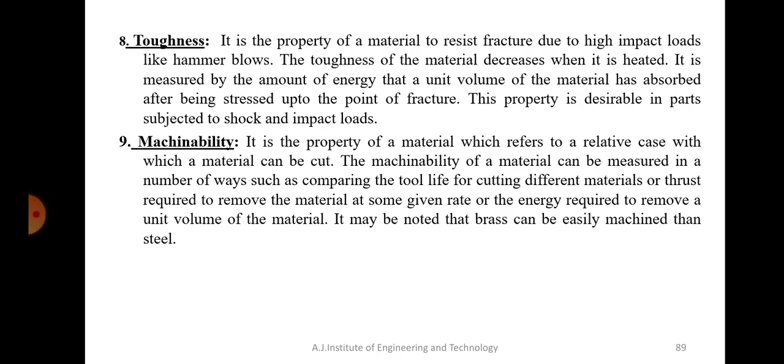Next, the last set of properties is resilience. What is resilience? Resilience is a property of a material to absorb energy and resist shock and impact loads. It is measured by the amount of energy absorbed per unit volume within the elastic limit. This sounds similar to toughness, but toughness is the ability of the material to withstand fracture, meaning without breaking. Resilience is the property of the material to absorb energy and resist shocks within the elastic limit.

These kinds of properties are usually required in the case of springs or suspension systems, because when the load is applied, it should be able to immediately take up the load and then release it. That is the work of a spring material generally. When there are shocks or impacts, it has to absorb that load and then release it, and it has to be elastic in nature within the elastic limit. That is called resilience.

Next there is one more property called fatigue. What is fatigue? If you see the previous kind of loadings I was telling you, suppose the material is to be broken at a particular load - that means you start applying the load onto the material, and at a particular load it is supposed to break. That is the maximum strength of the material, right?

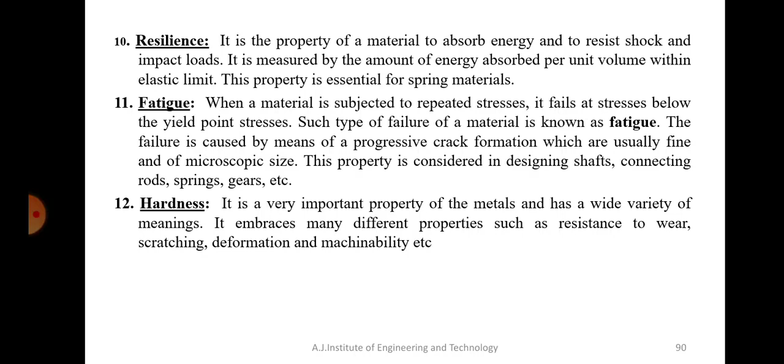So the classification of ferrous and non-ferrous materials, we have already seen this, but this is put in a table. On the left hand side we have ferrous materials, and on the right non-ferrous materials. Under ferrous materials, first is pig iron, wrought iron, then cast iron, which is categorized into 4 types: grey cast iron, white cast iron, malleable cast iron, and ductile cast iron. Then steels: low carbon steel, medium carbon steel, high carbon steel, alloy steels, tool steels, and stainless steels.

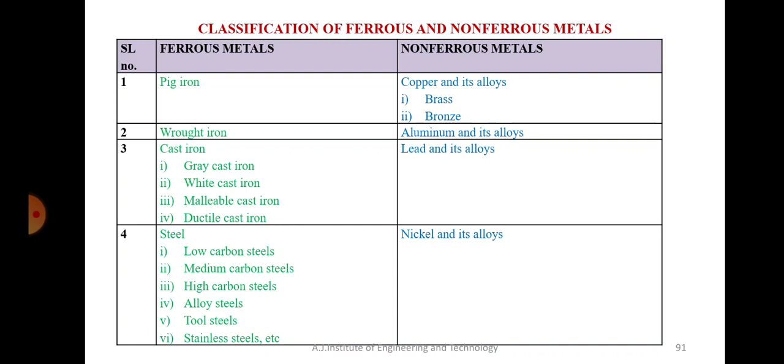Coming into non-ferrous metals, we have copper and alloys of copper, that is brass and bronze, aluminium and different alloys of aluminium, lead and different alloys of lead, nickel and its alloys. So we have to study both ferrous as well as non-ferrous materials. So first we'll start with the ferrous materials.

Okay, so ferrous materials, as I've told you earlier, I'm just repeating it again. These are the materials which contain iron as the major constituent. So majority of this is iron, and then we have smaller additions, which we have to see how it is differentiating. The major component will always remain iron. Depending on what you are adding into that will make different forms of iron.

So the principal raw material for all the ferrous materials is pig iron, which is basically obtained from smelting of iron ore with coke and limestone in the furnace. So where do we get this pig iron? Basically, pig iron is got from the ores. I hope you know all these things. You have studied this in your school, the different ores of iron.

So which are the different ores of iron you have? You have magnetite, hematite, limonite and siderite. There are four variants of iron ores. We get different ores in different places. We also get one in Kudremukh, which is very much near to us, Kudremukh iron ore. So we get different forms of ores in different places. From the ore, we extract iron.

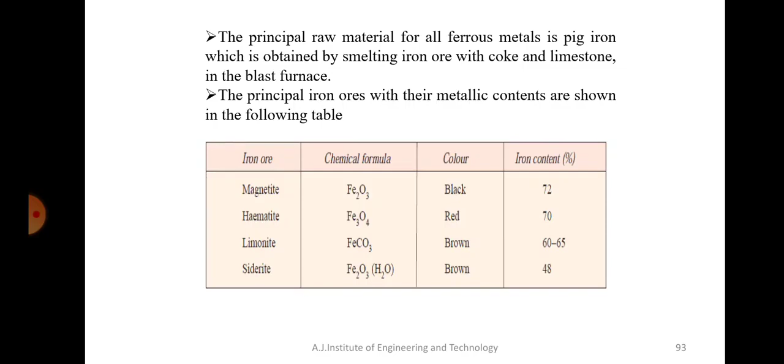So what does magnetite mean? Magnetite, the chemical formula is Fe2O3. It is generally black in color, and in this ore generally 72% iron is present. Similarly, we have hematite, which is Fe3O4, which is red in color, with 70% iron content. And limonite, FeCO3, brown in color, 60 to 65% iron. And siderite, Fe2O3(H2O), brown in color, around 48% iron. So these are the four ores from which we can extract iron.

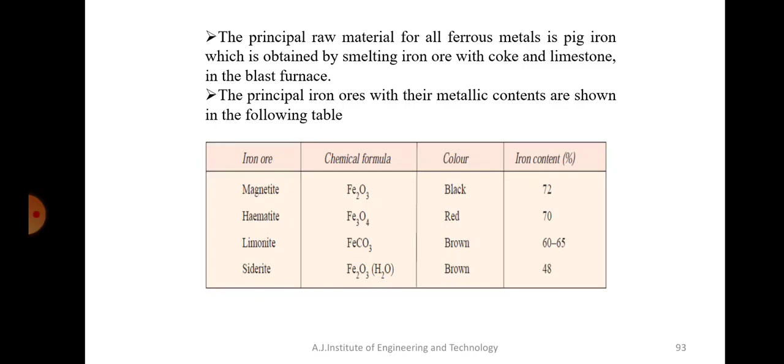We take this iron ore, we need a catalyst, we add coke and limestone, and then we heat it in the furnace. When we heat it in the furnace, the molten metal we get is actually pig iron. So what we obtain from that is called pig iron. Okay, so the first one, pig iron. So what is pig iron?

As I've already told you, pig iron is a semi-finished ferrous metal produced in a blast furnace by smelting iron ore and coke combined with a flux like limestone. So when you add iron ore with coke and limestone, what you get is pig iron. In the sketch here you can see, iron ore plus coke plus limestone, you get this pig iron. Now this is what I have told you.

So whenever you write in the examination, I know it's not going to be easy to remember each and everything, but at least try to remember the major constituents, their percentages, and then the properties and the application. For example, you need to write what is pig iron and how is it obtained. Pig iron is obtained when iron ore along with coke and limestone is smelted in a blast furnace.

Now what are the compositions? It contains 92% iron, 3.5 to 4.5% carbon, 0.5 to 3% silicon, 0.04 to 0.2% sulfur, 0.5 to 2.5% manganese, and 0.04 to 1% phosphorus.

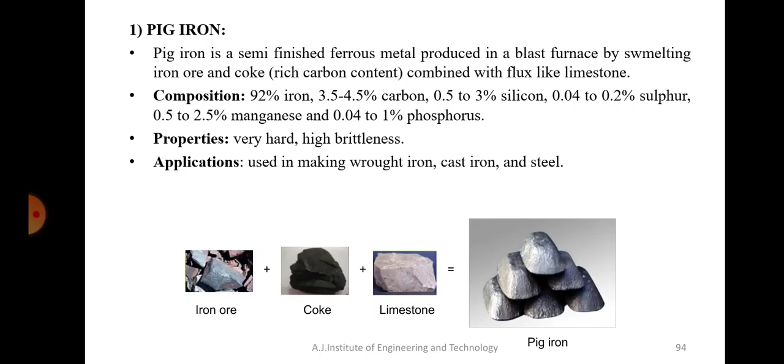Okay, so that is about pig iron. So next we will go to cast iron. Now cast iron is one of the important materials that is used in the mechanical field. There are a lot of products that are made of cast iron because of its different properties. Okay, so cast iron is a ferrous material that is produced when pig iron is remelted in a cupola furnace and poured into molds in order to make castings.

Okay, now what do you mean by this term casting? So casting is a process of producing a component, a part, by melting the base metal, melting the pig iron in this case. And when the pig iron is melted completely and becomes liquid, it is poured into some cavity. And when it is cooled, it will take the shape of the cavity and that becomes a product. And that is how cast iron is obtained. So that process is called casting.

Okay, and cast iron also gets its name from this process by which it is produced. Understand? Cast iron is generally produced by the process of casting, and that is why this iron is called cast iron. Okay, because it is made by casting.

So what is the composition of this cast iron now? It contains 90 to 92% of iron, 2 to 4.5% of carbon, 1 to 3% of silicon, and very small amounts of sulfur, manganese, and phosphorus. Almost the same things that were in pig iron, because you're not doing anything great here. You're only remelting pig iron, and then you are pouring it into a mold.

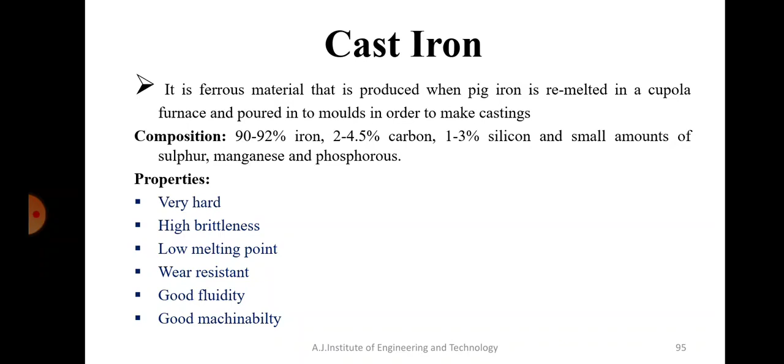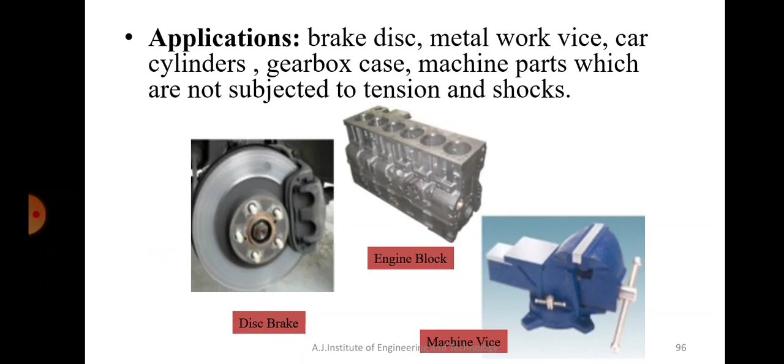So next, let us see some of the applications of cast iron. As you can see in the sketches, applications include brake discs, metalwork vises, cylinders, gearbox cases, and machine parts which are generally not subjected to tension and shocks, because it is brittle in nature and does not have good resilience and toughness. So you can see some of the components: the disc brakes, the engine blocks inside which the piston cylinders are placed, the vises.

What do you mean by this vise? A vise is used to hold the workpiece when you are doing some operations on it. That is, when you want to cut a metal part, or when you want to do filing on it to remove the top surface, you will fix that workpiece on a work holding device, and that is called a vise. Okay, so apart from this, it is also used in the casing of gearboxes, as shown in the figure.

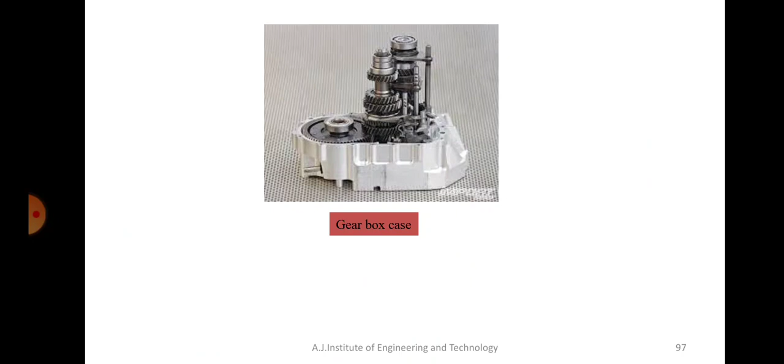Okay, so next is wrought iron. It is produced from pig iron again by burning carbon, silicon, manganese, phosphorus, and sulfur inside a puddling furnace. Okay, so you are varying the percentage of iron, carbon and other things, so that you get a different form of iron. Basically they're all the same, but because you're changing small amounts of materials in them, their properties will change. And depending on the change in properties, their application will change.

Okay, so its composition contains 99.8% iron, so the majority of it is only iron, with carbon content ranging from 0.05 to 0.25%, 0.12% silicon, 0.018% sulfur, 0.02% phosphorus, and 0.07% slag. So you can see 99.8% is basically iron with a very small amount of other materials.

Okay, properties. They are soft, ductile compared to cast iron, it has high toughness, better tensile strength, good machinability, good corrosion resistance, a high melting point, and good weldability.

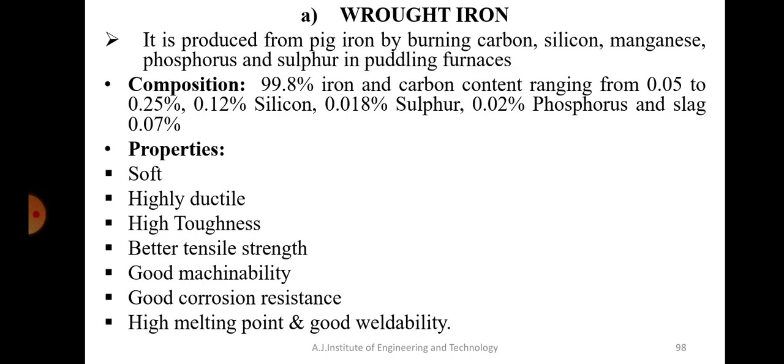Okay, so the applications: wrought iron is basically used in making pipes, water pipes as well as steam pipes, and in making bars, in the sense the metal rods we call bars. If it is usually circular in cross section, we call it shafts, and if it is of any other cross section, generally rectangular or square cross section, we generally call them bars.

Then it is used in making engine bolts, rivets, railway couplings, etc. Another important application, as you can see, is making iron bars and grills for windows, balconies, fences, gates, etc. It is also used in crane hooks and chains. All those sketches have been put here. Even in the next slide you can see all those things I've told you.

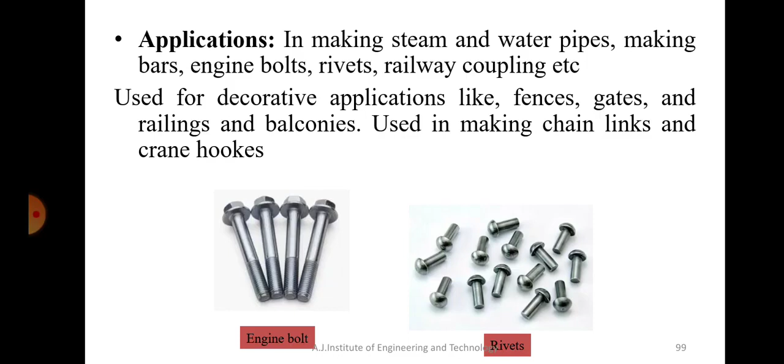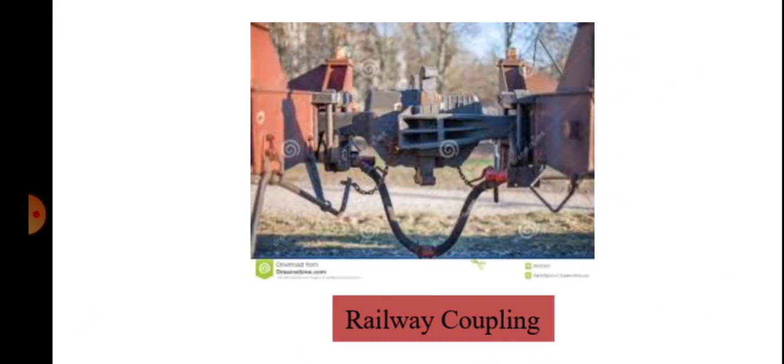So engine bolts are done in wrought iron. Rivets. In the next slide we can also see the railway coupling here. A coupling connects two bogies, one to another. Then boiler tubes, and also crane hooks. So these are the different applications where wrought iron can be used.

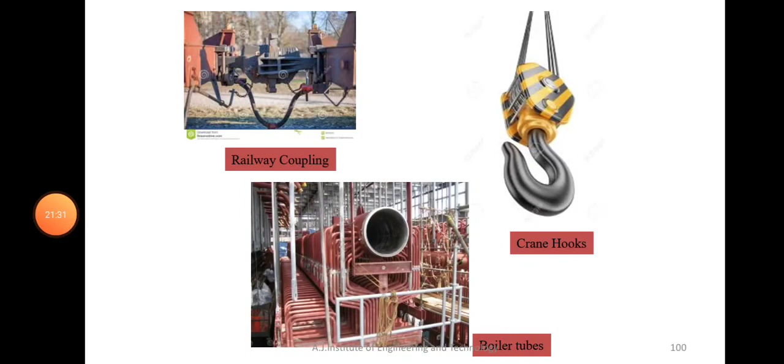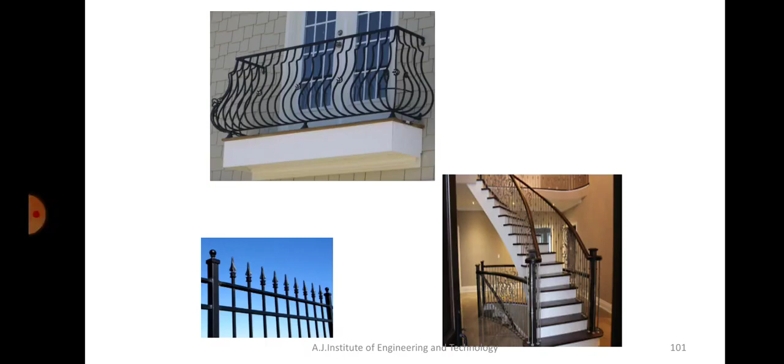Okay, so these are some of the examples again, as I told you earlier. You can see the fences, staircases, balconies, and grills all use wrought iron.

Okay, so next, within cast iron, is grey cast iron. What is grey cast iron, and why is it called that? Because of its microstructure. If you see the microstructure, there are graphite flakes present in this cast iron which are greyish in color, and that is why it's called grey cast iron. If I zoom into the sketch, this is the microstructure of grey cast iron. It contains these graphite flakes which are greyish in color, and that is why the name is given.

Its fractured surface appears grey due to the presence of graphite flakes. The composition includes 2.5 to 4% carbon, 1.3 to 2.3% silicon, 6 to 10% graphite, and small amounts of sulfur, phosphorus, and manganese, and the rest is iron. So obviously the major part is iron, with negligible quantities of sulfur, phosphorus, and manganese added.

Now the properties: it has high fluidity, very high compressive strength, excellent castability, wear resistance, it is brittle, and easily machinable. So it's highly fluid, has good compressive strength, good castability, it's wear resistant, more brittle, and easily machinable.

Applications of grey cast iron include manufacturing of piston rings. In IC engines, I did mention what piston rings are and why they are required. Those piston rings are usually made of grey cast iron. Cylinders and cylinder blocks, clutch plates, brake drums, gears and gearbox housings, and pump housings are all usually made of grey cast iron.

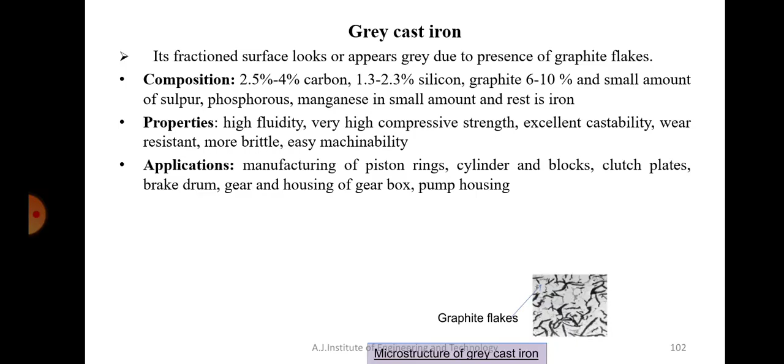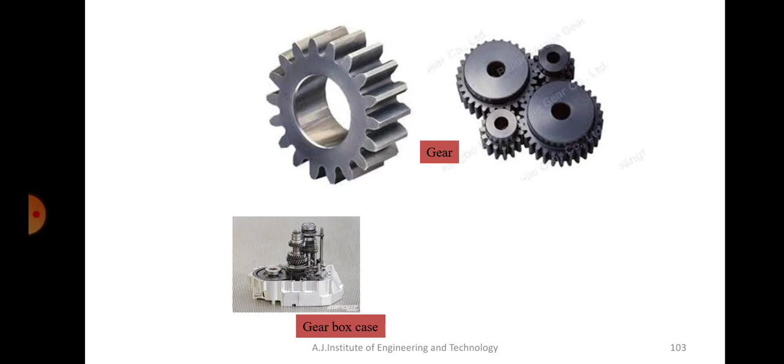So these are some of the sketches related to that: gearbox casing, gears, etc. Piston rings, as I've told you, you can see in the sketch there. These are the piston rings which are placed on the outer periphery of the piston.

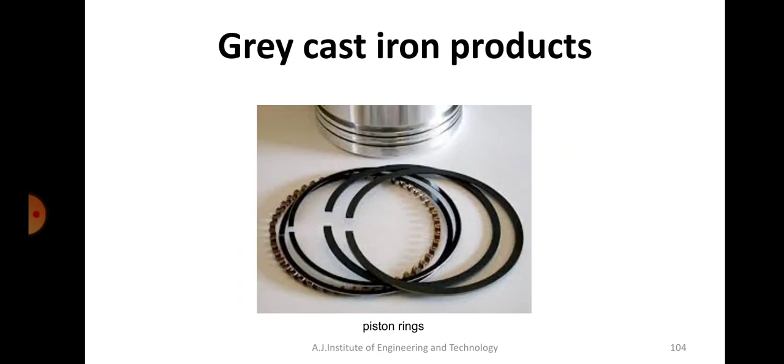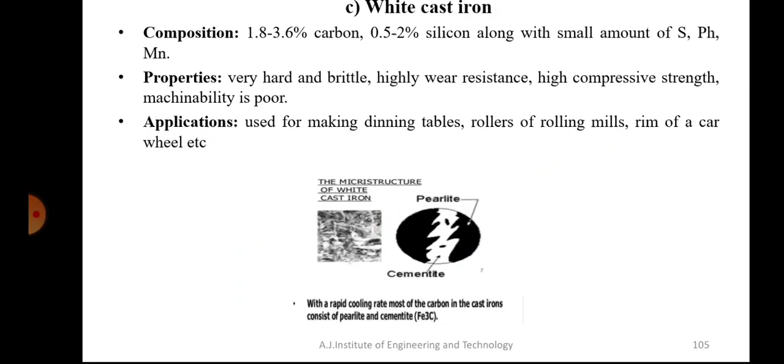Next one is white cast iron. Again, it's named because of the microstructure, because of the presence of cementite. You can see the microstructure on the left side, and it's further enlarged on the right side. There is something called pearlite and cementite. I don't want to explain pearlite and cementite, because that's a whole new subject itself.

What generally happens is when we heat any metal to a certain higher temperature, let's say around 900 or 1000 degrees Celsius, its microstructure will change. So you have grey cast iron or any other cast iron, for example, and you heat it to around 1000 degrees, keep it at that temperature for a long time, and then you cool it slowly or cool it fast.

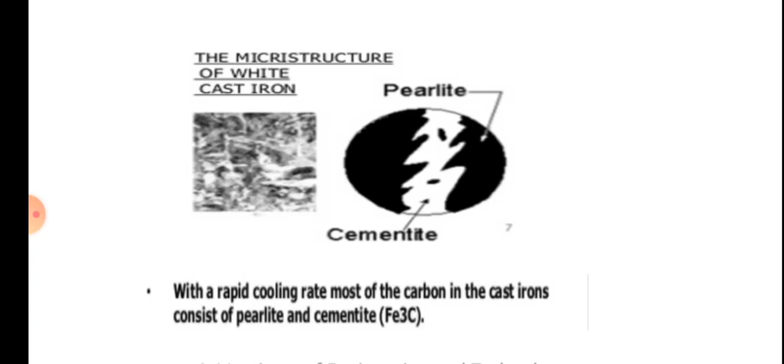There is a different procedure for doing that. So when we do that, the microstructure of the materials will change, and when the microstructure changes, the properties will change. So this is one such example that they've shown here. We're trying to heat the material and their microstructure changes, and there is a formation of something called pearlite and cementite in that. Because of that, it becomes whitish in color, and because of that, its properties will change. Because its properties will change, its application also will change. Okay.

So properties: composition includes 1.8 to 3.6% of carbon, 0.5 to 2% of silicon, along with small amounts of sulfur, phosphorus and manganese. Properties: they are hard and brittle, they are highly wear resistant, high compressive strength, but machinability is poor. Applications: it's used for making dining tables, rollers of rolling mills, rims of car wheels, etc.

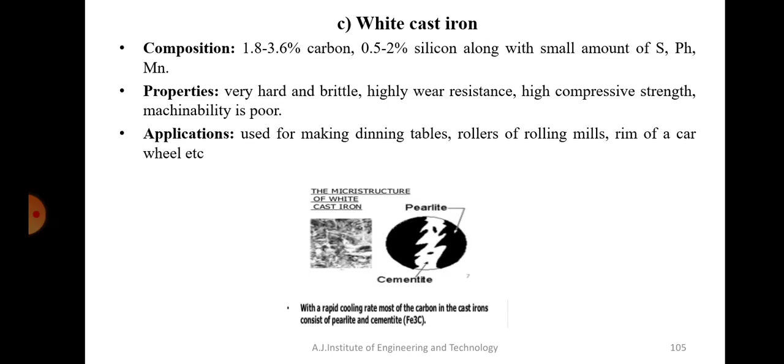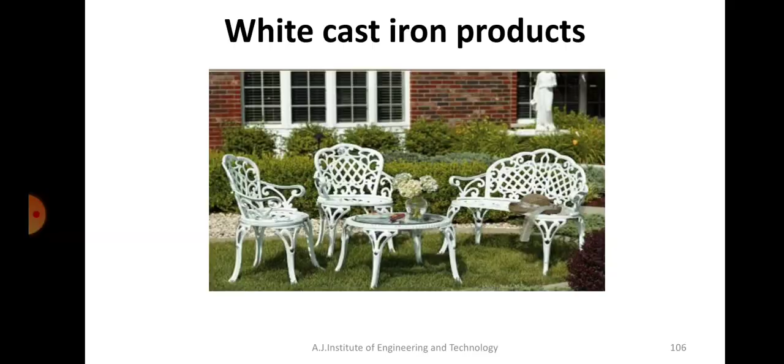Okay, so next one: in cast iron itself we had grey cast iron, white cast iron. Now we are studying malleable cast iron. So it is also produced by heat treatment of white cast iron. So I just explained what is heat treatment. Heat treatment is basically a process where you heat the material to a very high temperature and retain it at that temperature for some period of time, and because of this process, the structure or the microstructure of the material will change, and then a different type of microstructure will come, resulting in a change in its properties. Okay, so it is produced by heat treatment of white cast iron.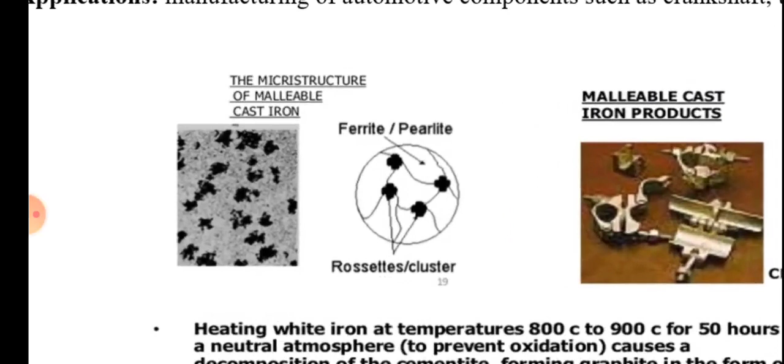Okay, so again we can just go through the microstructure here. So the microstructure of malleable cast iron will look like this. It will have another two components called pearlite and ferrite, and you can see the structure like this. And don't worry, you need not really draw these structures. They will not ask you to draw the microstructure of that.

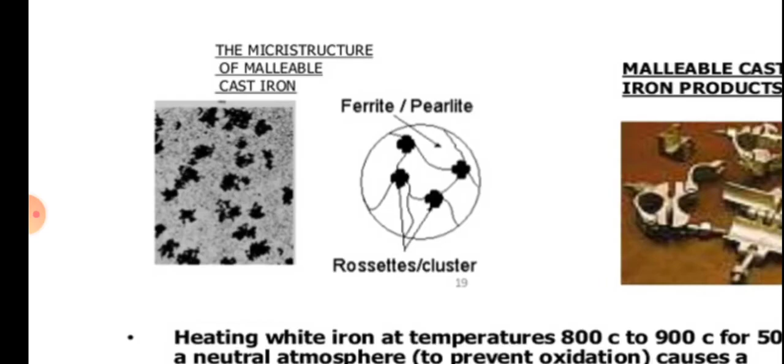I am just trying to explain these things because everything looks similar, isn't it? Because otherwise, if you just say the name white cast iron, grey cast iron, malleable cast iron, you may think why these different names are there. They are literally different materials. That's why I am showing you the microstructure and telling you the difference. There are differences in microstructures, saying that even though they are called cast irons only, malleable cast iron has its own properties, grey cast iron has its own properties, white cast iron has its own properties.

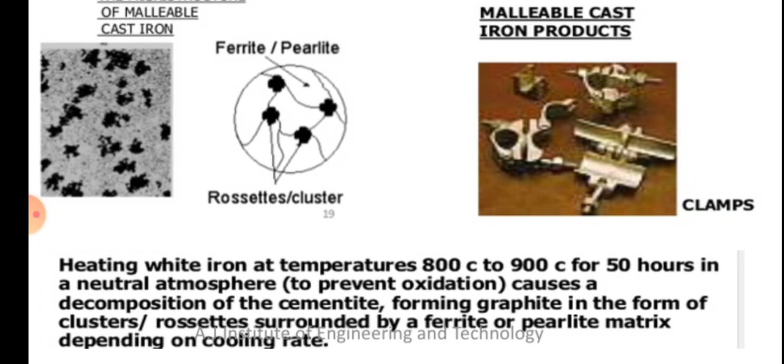So as you can see, it's written over here. This is obtained actually by heating white cast iron at a temperature of 800 to 900 degrees, and it is kept for 50 hours in that atmosphere, which causes the decomposition of cementite, forming graphite in the form of clusters surrounded by a ferrite or pearlite matrix depending upon the cooling rate. So that process is called heat treatment.

Anyways, you need not go very deep into that, but I'm just telling you because I have explained heat treatment, isn't it? So you heat it to a very high temperature, you keep it at that particular point for a longer period of time, and again it depends on how you cool it. If you cool it very slow, the properties will change. If you cool it fast, the properties will change again.

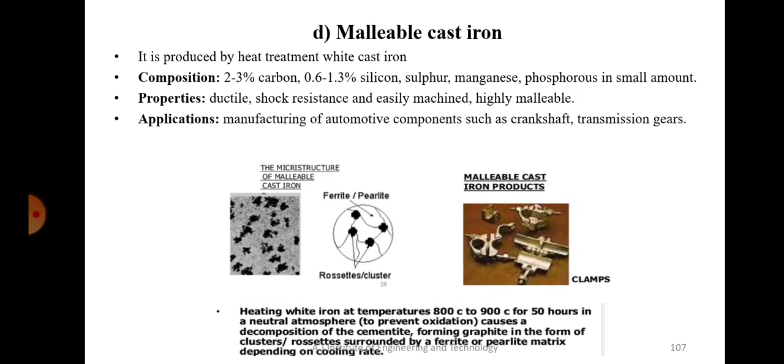Okay, so we have completed one part, that is cast iron and different types of iron. Now in the ferrous material itself, another important material is steel. There are varieties of steels: low carbon steel, medium carbon steel, high carbon steel, tool steels, alloy steels, and stainless steel, which I think you know is most commonly used in utensils.

So steel is basically an alloy of iron and carbon. When you have iron and carbon in different ratios, you get different types of steels. If the carbon content is less than 2%, and a very small amount of alloying elements such as sulfur, phosphorus, manganese, nickel, copper, etc. are used. Now first one in steels, we have low carbon steel.

What is low carbon steel? The other name for that, and a very common name, is mild steel, MS. Most of the materials we use in mechanical components are mild steel or low carbon steel. Composition: it contains iron and a very low carbon content, 0.16 to 0.18% of carbon, 0.4% silicon, and a small amount of sulfur, phosphorus, and manganese. Properties: it has very good machinability, good formability, it's malleable, ductile, has good toughness and good weldability. Applications: manufacturing of gears, screws, nails, rivets, nuts, pins, shaft, and many other components. Most of them are made up of mild steel.

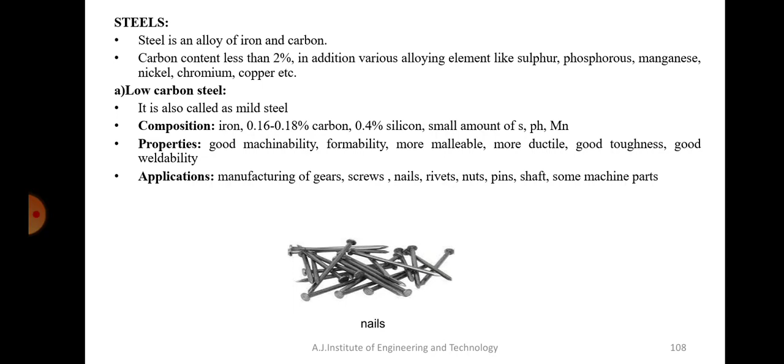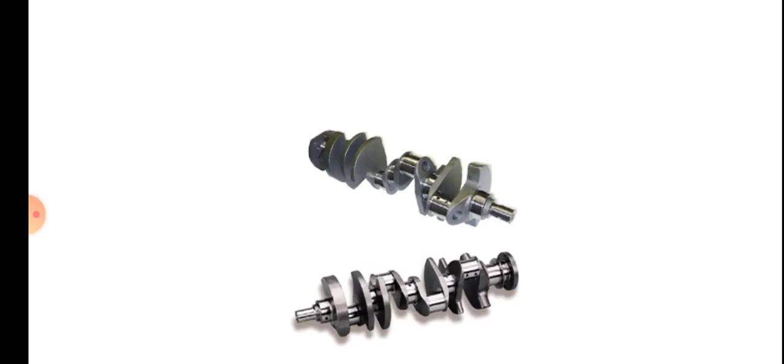Next is medium carbon steel, meaning the carbon percentage is slightly higher than low carbon steel: iron plus 0.25% to 0.59% of carbon. The properties are good wear resistance, high tensile strength, but less ductility. Applications: used in forging, appliances, manufacturing of automotive and other machine components like crankshafts, axles, springs, forging dies, rotor shafts, keys, hand tools, spindles, etc. I expect you to know some of these machine parts, since it's not possible for us to explain what forging dies, hand tools, spindles, or rotor shafts mean. You should know all these machine parts - crankshafts for sure, axles, springs, bolts, and other machine components. You can see the picture of a crankshaft here, a sketch of a crankshaft, which is usually made of medium carbon steel.

Next, we have three types of steels here: low carbon steel, medium carbon steel, and high carbon steel. High carbon steel should have the maximum carbon percent of the three. Low carbon steel is 0.16 to 0.2, medium carbon steel is 0.2 to 0.5, and high carbon steel is 0.6 to 1% of carbon, rest is iron. Properties: they possess high hardness and wear resistance, ductility is less than medium carbon steel. Applications: used in making most tools. Low carbon steels are generally work pieces, and high carbon steels are usually used for tools - for example, hammers, screws, hacksaw blades, leaf springs, etc. Some sketches are shown for your reference. You will need to write what steels are, the three types - low carbon, medium carbon, high carbon - the percentage of carbon, properties, and applications.

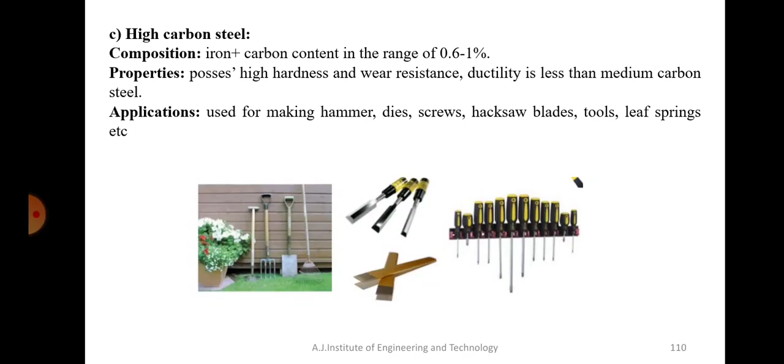Continuing, next is alloy steels. Why are they called alloy? Because they don't only contain carbon and iron - if they only have carbon and iron, we call that carbon steel: low carbon steel, medium carbon steel, and high carbon steel. When you have some other materials alloyed along with these, we call that alloy steels. So steels which have elements other than carbon to provide specific characteristics are called alloy steels. Their composition includes alloying elements such as nickel, chromium, molybdenum, manganese, silicon, etc.

Properties: they have excellent strength, corrosion resistance, high hardness and wear resistance. Applications involve manufacturing of aircraft, undercarriage parts, punches, dies and heavy gear containers.

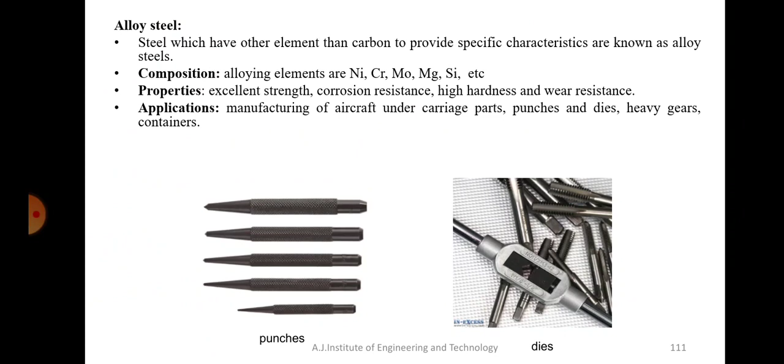So that's about alloy steels. And then we have stainless steels. I think most of you are aware of this material because it has a lot of applications domestically as well as outside. Steels which do not easily stain and are resistant to rusting and corrosion are called stainless steel. That's one beautiful part of stainless steel—they don't rust so easily and they will not have any stains on them. That's why it's called stainless steels. They shine. Most of the utensils we have are made using stainless steels.

Apart from that, they also have applications in the medical field. Most of the tools used there are made up of stainless steels. The composition includes iron-carbon alloy with chromium, which is the important alloying element for stainless steel, with chromium content varying from 11.5% to 25%. In addition to chromium, there are other alloying elements such as aluminum, copper and silicon. So for stainless steel, the major alloying element is chromium.

Properties: high strength and toughness, corrosive resistance, easy machinability. Applications: you can generally write anything—manufacturing of kitchen sinks, food processing equipment, surgical equipment, dental equipment, knives and blades are all usually made up of stainless steels.

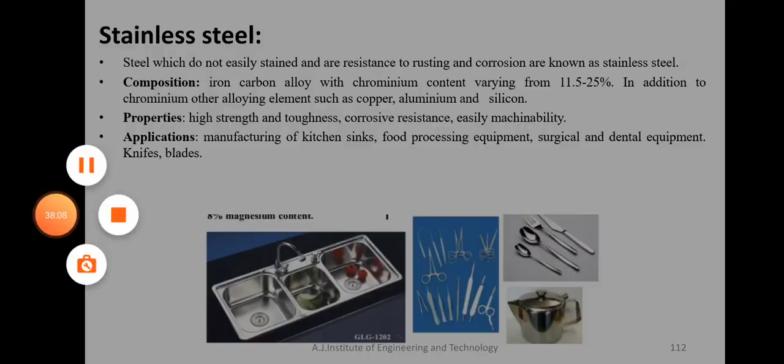So we'll go to the next one, that is tool steel. Tool steels are special steels with carbon content in the range of 0.8 to 1.2%. Tool steel, as the name itself indicates, is used for making tools.

The composition contains 0.7 to 0.8% carbon, 12 to 20% tungsten, 3 to 5% chromium, 1 to 2% vanadium and 5 to 10% cobalt. So you can see there are significant alloys added to this iron and carbon—apart from iron and carbon, there is tungsten, chromium, vanadium and cobalt added to it.

The major purpose of this material is to make tools. They are not used as any products or materials themselves; they are usually used as tools to cut other materials. That's why it's called tool steels. One of the most important tool steels used in the mechanical field is HSS, that is high speed steels.

Properties: they are very hard, very good wear resistant and also good abrasion resistant. It is used for very high speed applications, for making tools and dies. High speed steels, that's a very common tool that we are using. They are used for cutting materials which are rotating at very high speeds.